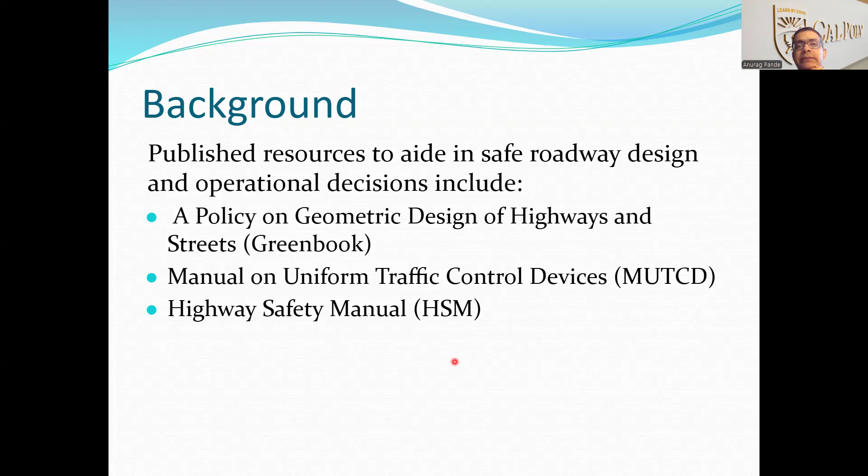And we use these documents all the time. But what you would find is that a lot of information, especially in those first two documents, the AASHTO Green Book and its California counterpart, and the MUTCD and its California counterpart, you will find that a lot of standards are not necessarily based on a lot of research. So if you look at these two standards, there could be a lot of limitations.

So what I want you to think about, give it a couple of minutes: we've seen use of highway design standards in CE 321, for example. We do talk about some information from that. We don't talk a lot about MUTCD in CE 321, but maybe you've taken CE 421 traffic engineering, or in general thinking about design standards, minimum radius required, super elevation required, turning radius, design speed on a curve, and sight distances and so forth. Think about those types of standards.

What are some of the limitations of using those standards? If you could put those in the chat, that'll be great. Take maybe a couple of minutes to think about it and write them down, either in chat or on paper. Then when I ask about it, you can respond to me, either via voice if you've written it on paper, or I can just read it off your chat. So just think about what you think are the limitations of using existing design standards. I'm going to pause here.

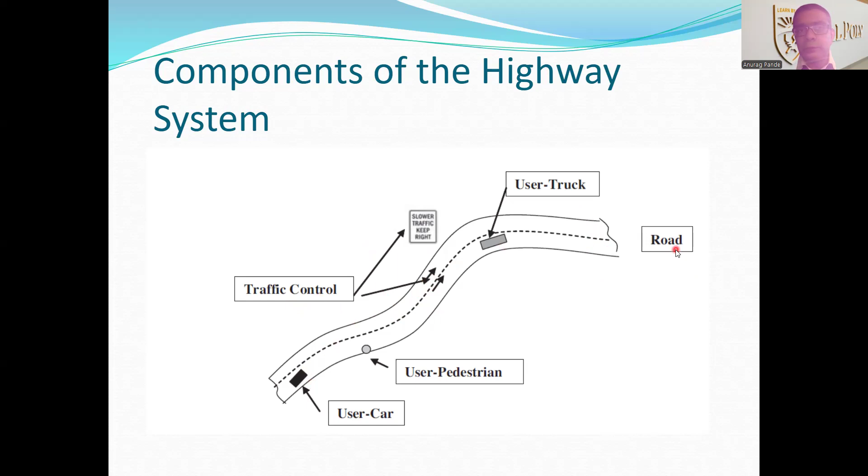Think about a permitted left turn, where drivers are making a left turn either on a flashing yellow arrow or a green ball type of light - there's an absence of a red arrow. Drivers may be making the left turn but have difficulty estimating gap size and speed of approaching vehicles. But that difficulty depends on the roadway environment, because if there's only one lane of through traffic they're crossing, maybe we're okay - maybe we can let the drivers decide. But if they're crossing 3 lanes of traffic or 2 lanes, then their difficulty in estimating gap size and speed could be much worse - their difficulty level might be much higher.

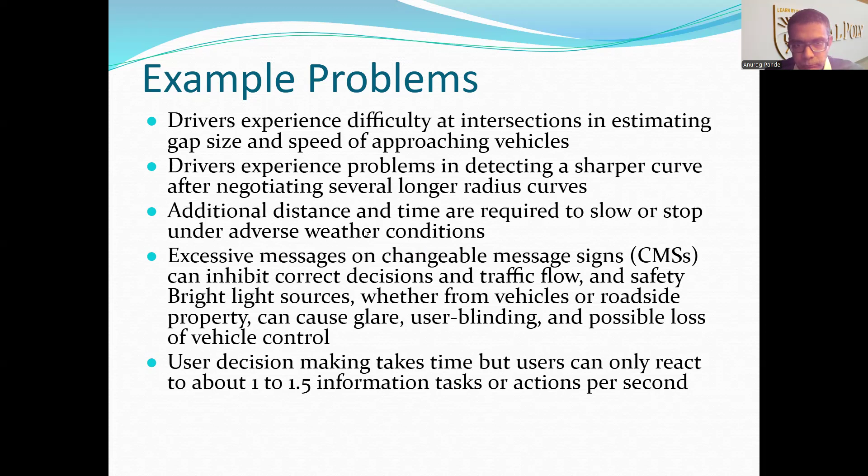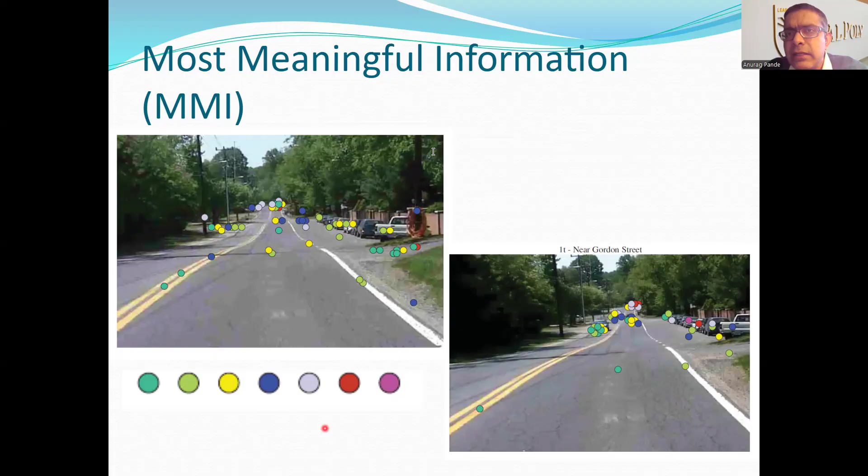So here is a question about a human factor experiment that was conducted as part of the human factor guidelines 600A. I'm just going to go ahead and open that one up a little bit. Again, you don't have to print this whole thing out, but there is some interesting things that I'm going to have you work on using this human factors guide. This is an old NCHRP report, not very old. This is NCHRP report 600A, I think published in 2008. So this is old, but still very relevant to human factor design.

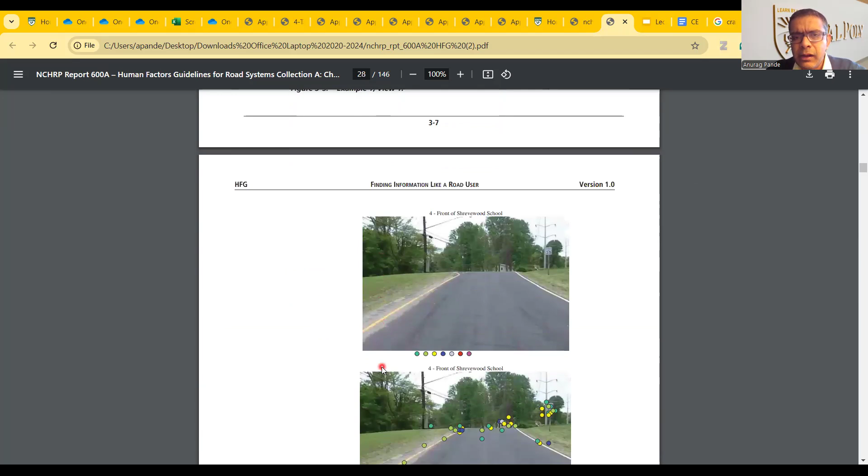What it does is force the system designers or traffic engineers to find information like a road user. They want you to think about, as a road user, how road users are going to seek information, how they're going to apply for information, or how they're going to react to that information and so forth. It has a bunch of different guidelines. This is basically what I've been working through, and this is what you have to think about. Then what they had done is this was their experiment for a driver, about what drivers choose to focus on versus not. So I want you to think about this a little bit.

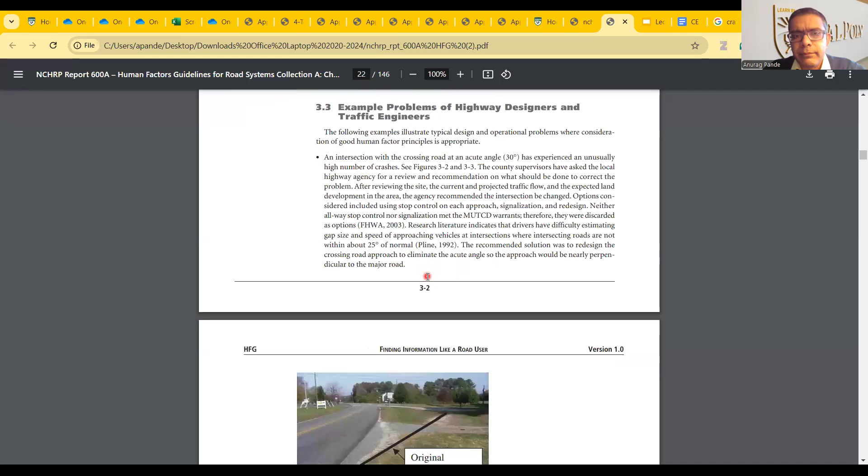So what they did was show a bunch of recruits, the survey recruits, this image of the roadway, and then they didn't show them obviously the dotted image. They showed them this image right here.

They showed them this image and asked the road users what is the most important information to them, and had them react to the most important information. A lot of folks said they were looking at the roadside. This is everybody's response in general - some of them pointed out that the most important information for them was what's happening right in front of them. They were focused on the road, but they also wanted to see if this car is going to pull out or something. But a lot of them pointed out that this is where the most important information was, what the drivers were looking at straight ahead.

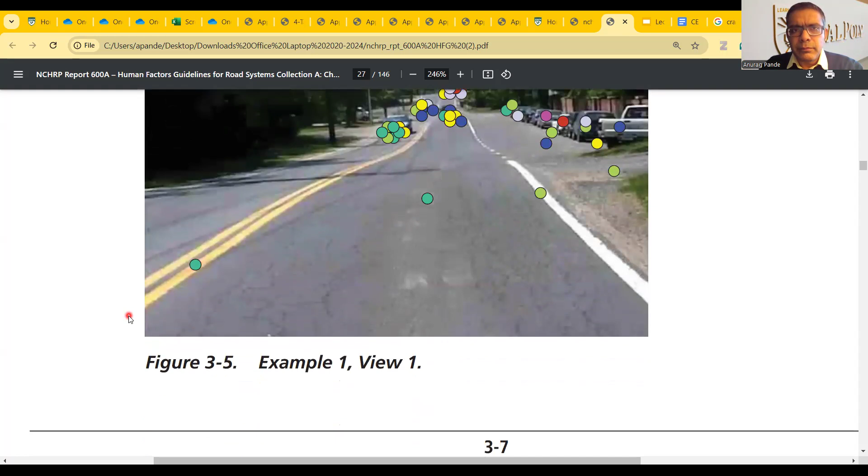In the same environment, if you put in an oncoming car here, same roadway place, now if you're analyzing this particular environment, almost everybody said the most important information was right there - what that oncoming car is doing. So what drivers deem to be most important changes based on what's happening on the road, which makes sense, right? This is how it should be.

But it has certain implications for how we design the road. For example, look at this picture. This is the roadway location, and this has a little bit of a hill block view type of situation - probably like a vertical curve. It's a hill, and what this hill does is it makes it harder for the drivers to spot what's happening beyond this vertical curve, because once the roadway goes down, this is blocking their view.

Now, when the drivers were asked for this environment what is the most important information - MMI being most meaningful information - guess what they responded with? They responded with this thing right here, their focus being over here - a lot of green signs over here.

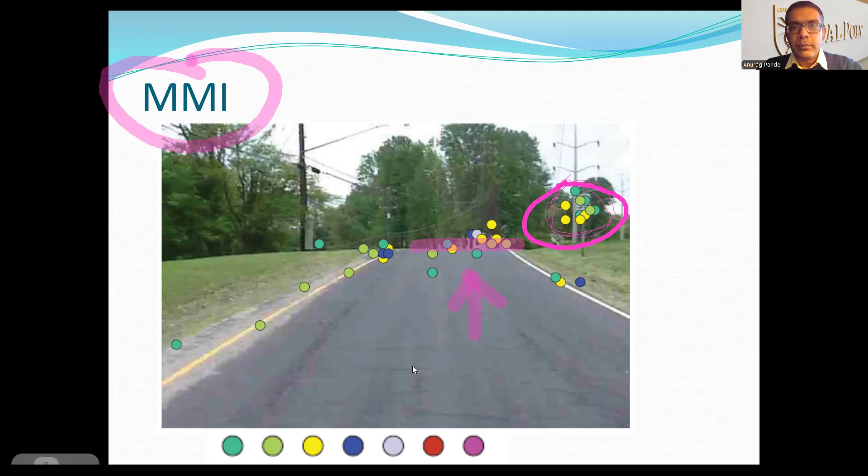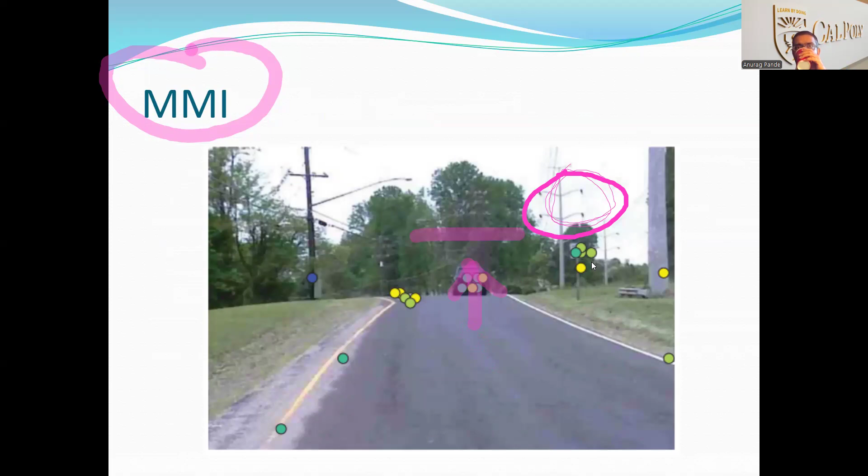Now there is a car in front of them that probably changes things a little bit. You can see that more people were focused on the speed limit sign. When there is a car, some people did shift, but there is still a lot of people saying that the speed limit sign remains the most important information. So that is the sort of challenge of your safe systems design or safe roadway system.

Okay, so for safe roadway systems, for us to have a safe roadway system, or for us to design a safe roadway system, what we need to do is become virtual road users and avoid unintended use of the infrastructure.

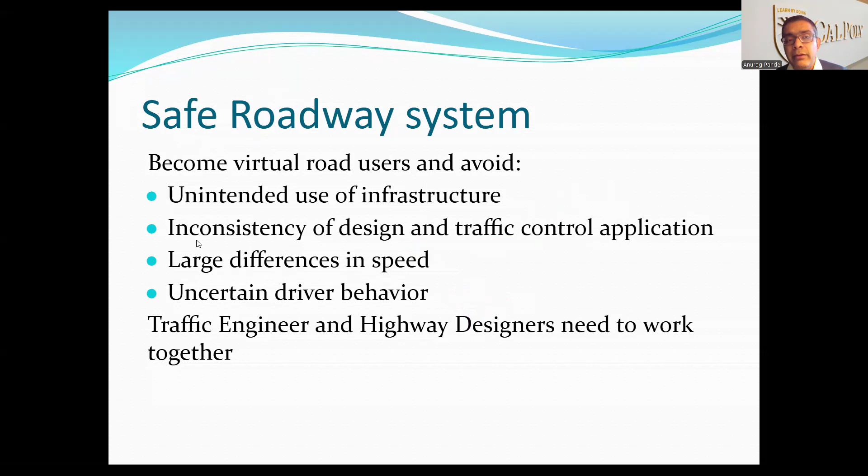We need to avoid inconsistency of design and traffic control application, large differential in speed, and uncertain road user behavior. Traffic engineers and highway designers need to work together to make sure we are providing that safe system.

And when we are thinking about safe systems, it becomes very important to think about what is the roadway environment that the road user is going to scan in each step, as they're driving by, walking, or if they're a pedestrian or a bicyclist. What is the length of the roadway environment they are examining?

The examined roadway environment could go as far as the sight distance. Whatever sight distance they have available, hopefully they're utilizing all of it and scanning that much road environment. That could change, because the sight distance changes based on the speed you're driving at. You need to be able to see more of the roadway if it's a high-speed facility, so more of the roadway must be visible to the driver.

So that scanning step size varies based on certain factors. I want you to take a minute, not looking at the slides, to think about what changes the scanned step size for drivers. What factors might influence how much the step size is? What does this size depend on, how long is it going to be that drivers are able to scan? What factors does that depend on?

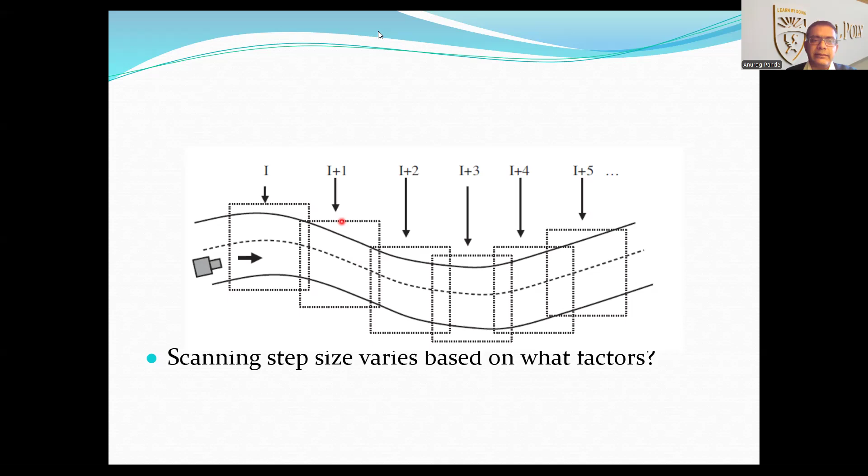You can put the responses in the chat. I see a couple already. Yeah, speed of travel, that's good. Other factors? The terrain, other cars, or the road blocking the view. Yeah, speed and topography, that's very good, that's exactly what it depends on. The weather, yeah. How many curves and what's along the way. So the curves are going to be determined based on the topography of the area and what is happening along the curve. Some good responses there, that's very good, thank you.

So scanning step size can be based on a lot of different factors, the context of the surrounding area. It's all very good. You could see that they could be user-related factors, operations-related, how the operations is going, the roadway-related factor, and then the environment itself.

There are so many different things that can affect that step size: the user's age, user's vision, user's experience, cognitive ability, road familiarity. For operations, vehicle type, speed, whether it's one-way or two-way traffic, what type of control you have, so how much you're able to scan depends on whether you're coming to a complete stop or whether it's a yield sign. Then there's the highway, what's the functional class, which will determine lane width and shoulder width and sight distance, pavement type and condition.

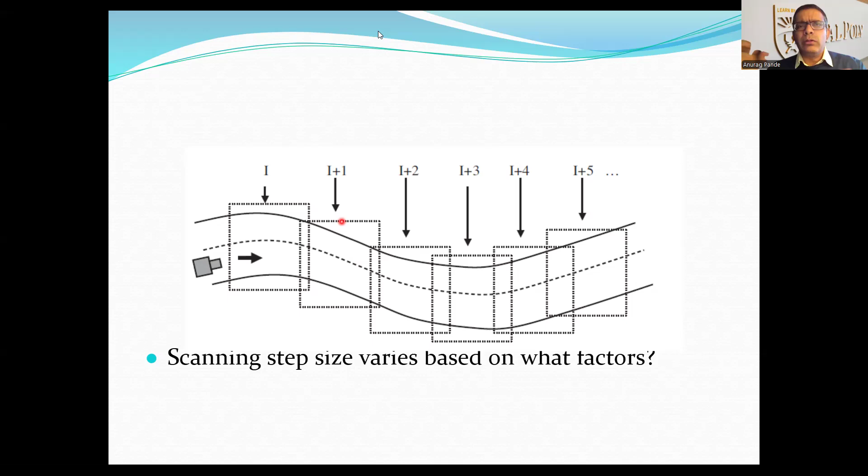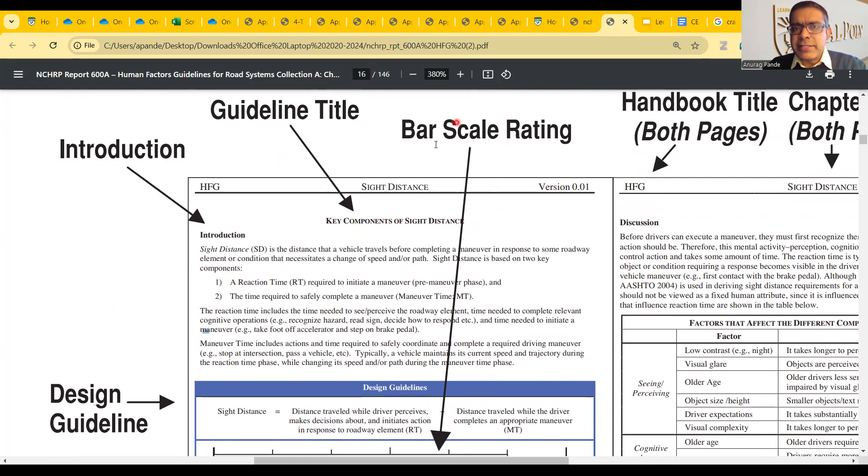So they've provided a consistent form for everybody to look at. For example, the first thing they provide is some introduction, some background, the guideline title - so the key components of sight distance is the guideline. There's an introduction, and then there's the bar scale rating I was talking about.

If something is based primarily on expert judgment, that basically means some engineer 40 years ago just pulled it out of their hat. Or if the gray bar progresses and goes all the way up, that means the guideline is very reliable because it's based on empirical studies. This one doesn't quite go fully across the bar, but it goes almost 9/10 or 8/10 of the way, which tells me it's based on some empirical data at least. So that's a reliable guideline to me.

And then what's the guideline? Sight distance is the distance traveled while the driver perceives, plus the distance traveled while the driver completes an appropriate maneuver. So it's the reaction time and the maneuver time. If you add those together, that's the distance you travel during reaction time plus the distance you travel during maneuver time - you add those up to come up with the total sight distance that you require.

Okay, so then they have some discussion on it - they'll have a graphic and some discussion. And once they have that discussion, they'll have some tables or something to go with it.

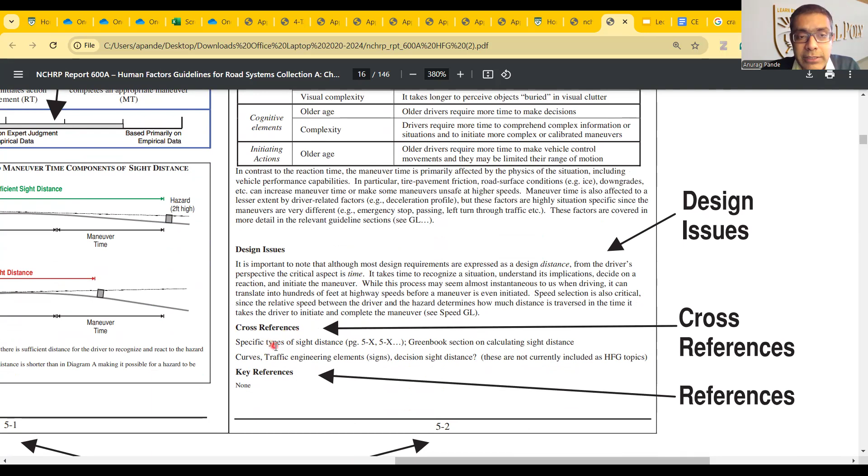There might be some cross-references if there are other types of guidelines that are either affected by it or affect other guidelines, so they'll provide cross-references there. And if there are some key reference studies, they provide that as well.

So this is one way to look at this guide. What I want to do is look at the guide on right turns on red to address pedestrian safety, guide 11.4. I'm trying to answer Hans's question in the chat about that gray bar - is it a trustworthiness rating of various human factor guidelines? I wouldn't call them nominal safety metrics, but yeah, it's a trustworthiness rating of the human factor guidelines that this provides. Let's look at 11.4 and have some discussion on that.

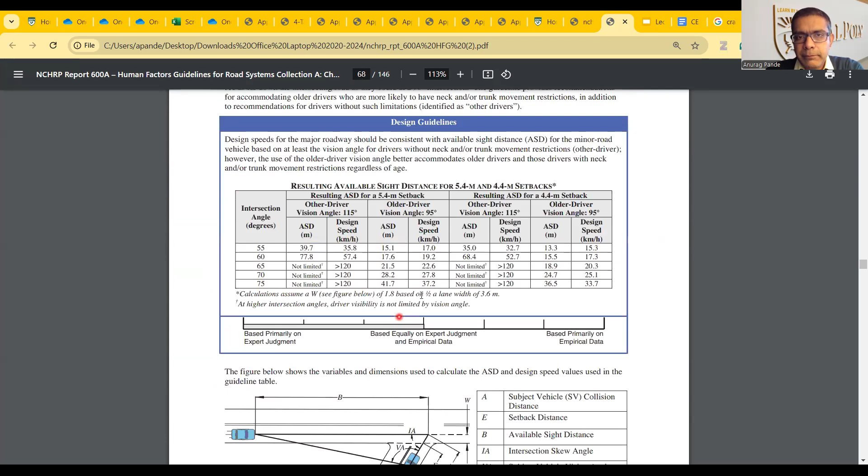I'm going to go to chapter 11. So I want to look at this 11.4, restricting right turns on red to address pedestrian safety. Yep, this is the one. This is page 11.3, so now this is page 11.4 right here. You can see that at the bottom, this is chapter 11.4.

So you can see that this right turn on red guideline is not as based on empirical data as the one I was showing you earlier about sight distance. That just means that whether or not to prohibit right turn on red at an intersection, there haven't been as many empirical studies as there have been about sight distance.

What's the design guideline? Restricting right turn on red can be used to reduce conflicts between pedestrians and turning vehicles and to increase the likelihood that drivers will stop before turning right at an intersection. That's the purpose of this guideline. The most effective method is to base turning restrictions on time of day. Basing restriction on presence of pedestrians will also reduce conflicts, but this approach appears to be significantly less effective than time-based restriction.

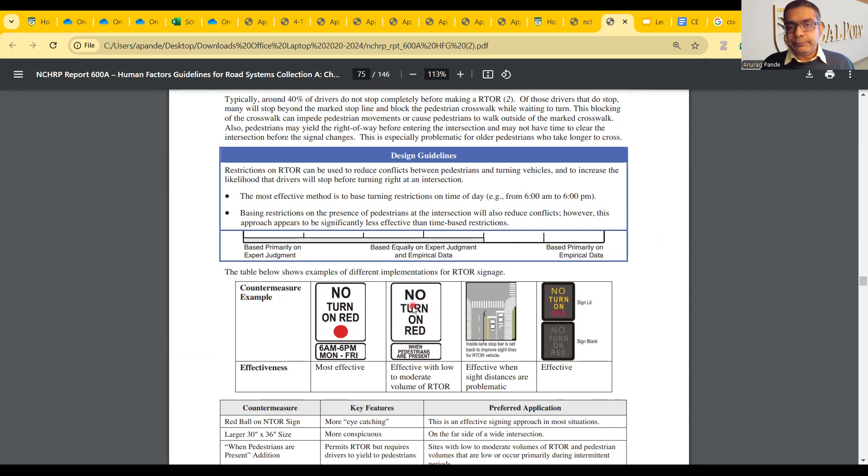You can see the countermeasure example: no turns on red, 6am to 6pm Monday through Friday - most effective. But then, no turn on red when pedestrians are present, that could be tricky, because then the drivers can always maybe not even see the pedestrians, for whatever reason.

Sometimes they will have the right turn vehicle's stop bar placed a little further up front. So you can see they're providing examples of RTOR signage that you need based on these human factors. They've moved the stop bar for the right turn a little bit further ahead, so the vehicle can stop further ahead - because they want drivers to be able to see what's happening and where the pedestrians might be.

So when the sight distances are problematic, this is what you might want to do - provide that additional buffer for the drivers to come up a little further ahead. And then they address whether or not it's effective - when right turn on red is in effect, they provide the sign versus they don't provide the sign, and so forth.

They also have different countermeasures to encourage drivers to stop as they are driving through. Red ball on NTOR sign - most eye-catching, a preferred application. Effective signing application in most situations, so that's a good thing. They're looking at these human factor guidelines and suggesting countermeasures that account for the human factors in that context.